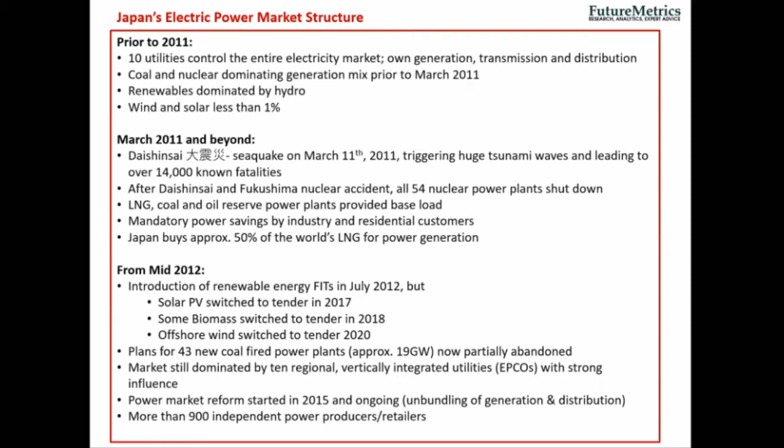Overall, on the renewable side, as of the end of last year, Japan had a total of 63.4 gigawatts of renewables capacity operating. As you can see, the vast majority is solar PV, but then there's about 4 gigawatts of biomass power. What's going to happen in the next several years is offshore wind power as well - there's a project pipeline of over 15 gigawatts in planning.

Another major factor that will drive especially biomass power development in the future is the capacity market that basically started this year. The capacity market provides an opportunity for a power plant to be ready to provide a specific amount of power when needed, either because there's demand or because it's required for grid stability. That capacity market hasn't existed before, but it's starting now, and it's another opportunity for power plants in general, but also biomass power plants, to sell power into the market.

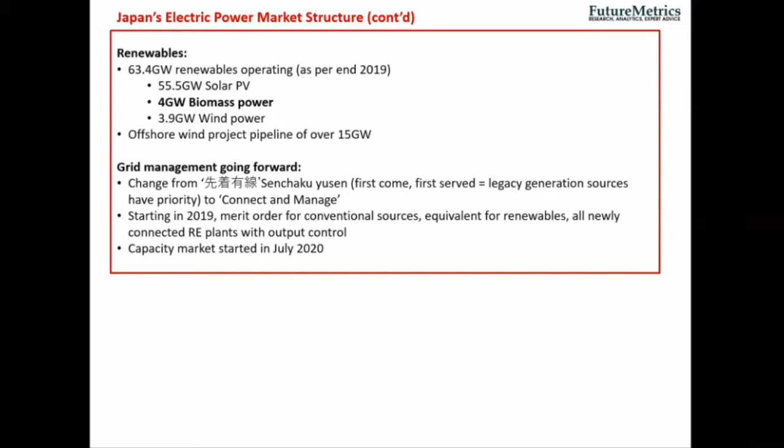So what does power generation in Japan actually look like over the past 10 years? Obviously, up until Daishinsai, up until March 2011, nuclear played a major role. The nuclear power plants were stopped, and you saw a spike in the use of fossil fuels - basically coal, liquefied natural gas, and oil. Those were reserve power plants that most industrialized nations have - plants that normally don't run, or run at very limited base, but kick in during a major emergency.

So Japan actually got through this major shift by conserving energy, but also by switching on and running their reserve power plants.

By the end of 2019, renewables, if you include hydropower, which Japan has had quite a bit of even before Daishinsai, now supply roughly 20% of Japan's power demand. The existing Japanese government plan has a target of 22 to 24% renewables by 2030. So that's close to being achieved already, and I think we're all looking forward to the new government strategic energy plan, supposedly coming out sometime this year, to see if the target is being revised.

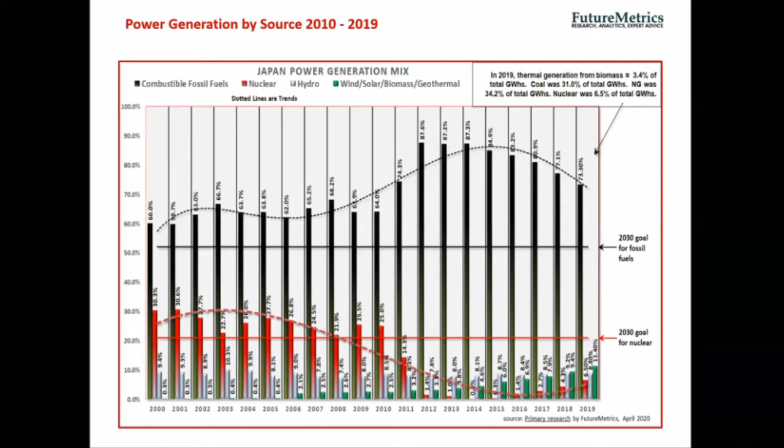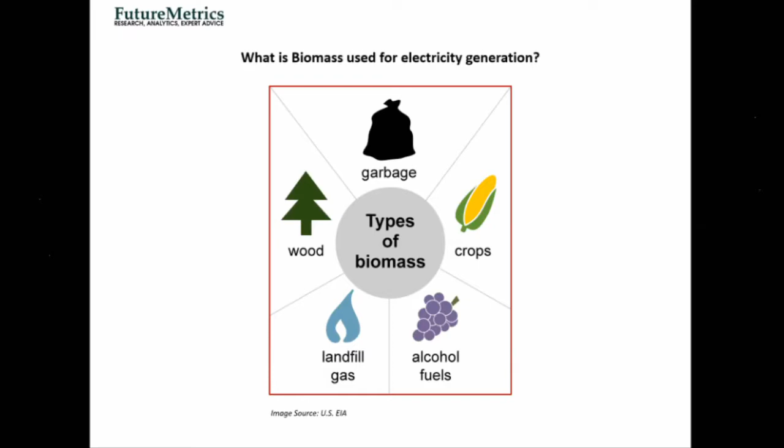So when we talk about biomass for electricity generation, what does that actually mean? Biomass can come from different things - it can be garbage or trash, as we say here in America, it can be different crops, different alcohol fuels, landfill gas or other biogas, and obviously wood. Our focus today is mostly on woody biomass and a little bit on crops, because we're going to talk a bit about PKS.

So when we talk about wood, there's always the question - can the use of wood be sustainable? There's forest management, there's good wood and there's bad wood. Like with any energy source, if it's done right, if it's done well, it's sustainable, or less harmful to the environment. If it's done without any system or control, it causes damage.

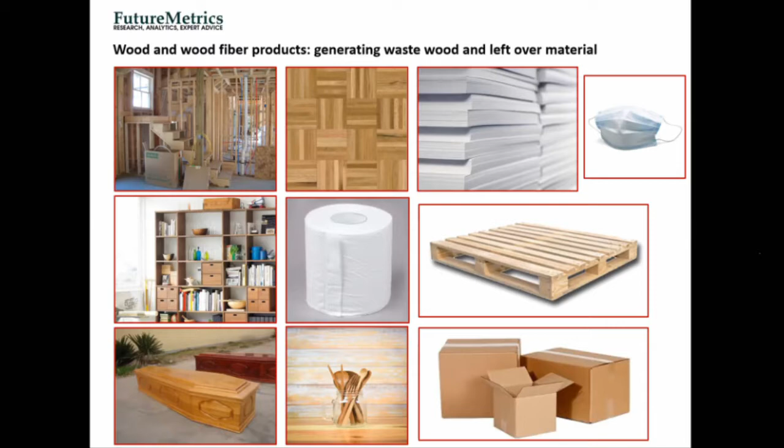Wood pellets are specifically manufactured for energy use, and they're normally sold under long-term supply contracts. That's very important, because it's the confirmed supply contracts that make a biomass power plant a bankable project. If you apply for financing with an investor or a bank and you cannot show where your fuel supply is coming from, you will have a tough time getting financing for your projects.

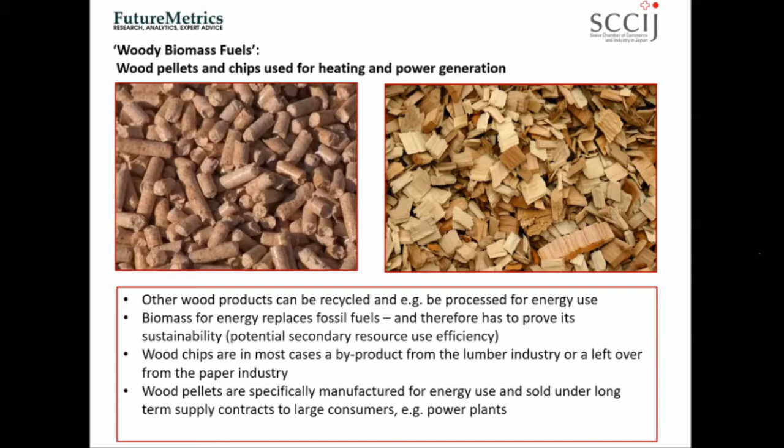Wood pellets in particular use part of the tree that isn't being used for anything else - it can be sawmill residues, from sawmills that saw your lumber for home construction - that's basically trash, so pellet mills buy that. Or wood thinnings, when you have trees that you have to cut to make room for the remaining trees to grow. It can also be low quality wood.

For example, the Canadians have had their fair share of wood pests, and they've used trees damaged by different insects that you couldn't use for high quality paper or other high quality wood products - you can use them to make pellets. It's a topic being discussed in Germany right now because they have over 32 million cubic meters of bark beetle damaged wood.

It can also be limbs. What good pellet producers avoid using is full saw timber - that's high quality wood that can be used for a lot of other more high value products. Later, either the waste wood from the manufacturing process can be turned into pellets, or when that product, whether it was housing or some other lumber product, is at the end of its use, it can be turned into pellets.

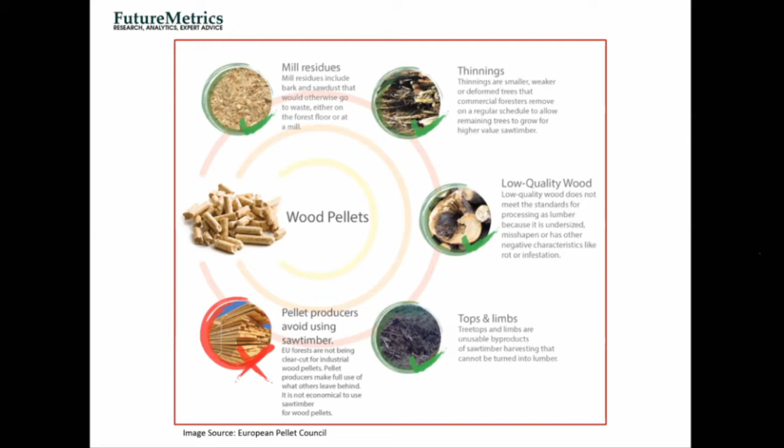The other biomass having a fairly sizable role in Japan is palm kernel shell, or PKS. That's basically a byproduct from palm oil production, coming mainly from Indonesia or Malaysia. It's sold at spot market price or short-term contracts, so it's not a bankable fuel. It's a cheap fuel, but unlike pellets, it's not made specifically for power generation - it's something you can buy as an add-on fuel, but you wouldn't really plan a total power plant to be fueled with palm kernel shell.

PKS is also quite controversial because, again like with woody biomass, you have palm oil plantations with sustainable management, and then you have sort of Wild West PKS farms. So making sure that the PKS brought into Japan actually comes from sustainably managed palm oil farms is a challenge and quite a controversial subject - it's actually a topic the Japanese government is trying to introduce more regulations on.

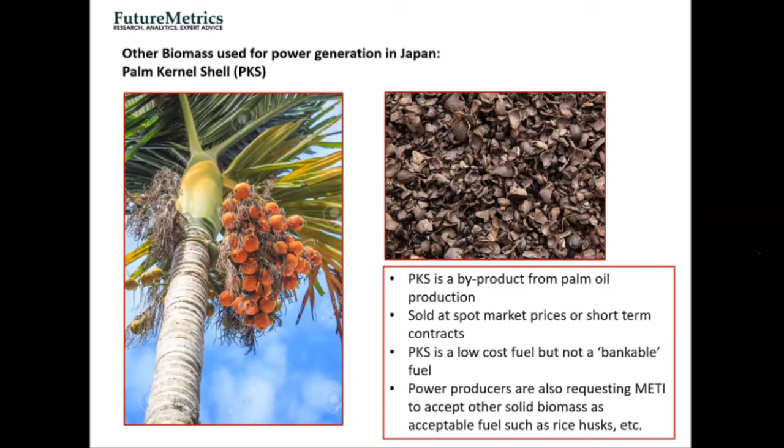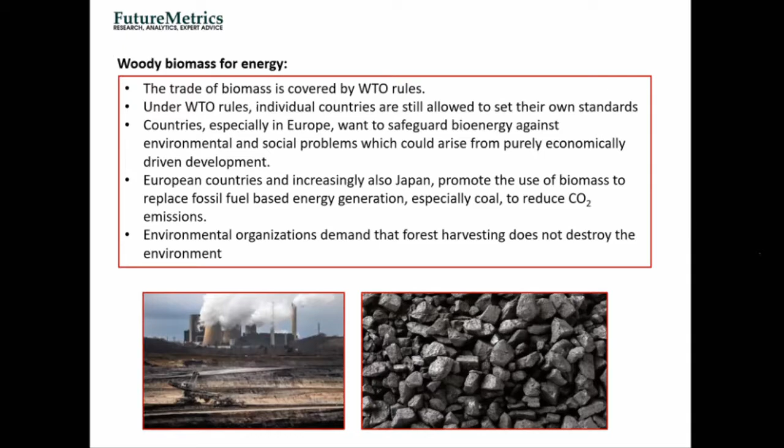So in Japan, how does it work in terms of how the power generated with biomass power plants actually gets sold?

The way it works in Japan is the feed-in tariffs were launched in July 2012. Every year there's a METI pricing committee that sets the new tariff for any new projects that apply for new certification. So if you got your feed-in tariff for your project in 2012, and a few years later you commission your plant, but you applied for it in 2012, you get the 2012 tariff.

If you applied for feed-in tariff certification in 2017, you get the 2017 tariff. So as you can see, it started off with basically only 3 different categories. Biomass, which was only forest thinnings, meaning mostly domestic Japanese wood for biomass power plants above 2 megawatt, got 32 yen, a good price. For roundwood, 24 yen. You can already see the government said from the beginning, we don't want roundwood or biomass from roundwood being fired. We want to use that for higher value products. And then you got a different price for construction debris.

So that has evolved over time. The government introduced a special feed-in tariff for small biomass power plants up to 2 megawatt, and those are mostly plants in rural areas in Japan that use local wood and biomass supplies. It's as much an energy promotion aspect as it is an economic development to revitalize rural communities and use the woody biomass that's available in those areas.

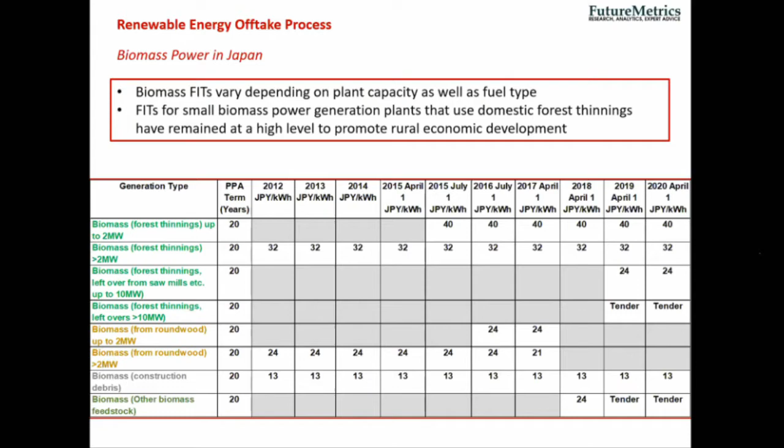And then in 2019, for larger projects, the government basically stopped the confirmed flat rate 20-year feed-in tariff and switched to a tender system, just like they had done in 2018 already for solar PV.

So when we look at the tenders, it's still fairly new. The first tender was in 2018 for 180 megawatt. What the government does, they have a ceiling price, or the maximum price that a bidder can put in, but they don't disclose that, so you have to be second guessing what it might be. There was basically only one winning bidder that stayed below the 20.6 yen per kilowatt hour, which was Soma Kyodo Power. But then they canceled their bid because they decided to wait until this year to bid into the capacity market, because they will get more per kilowatt hour.

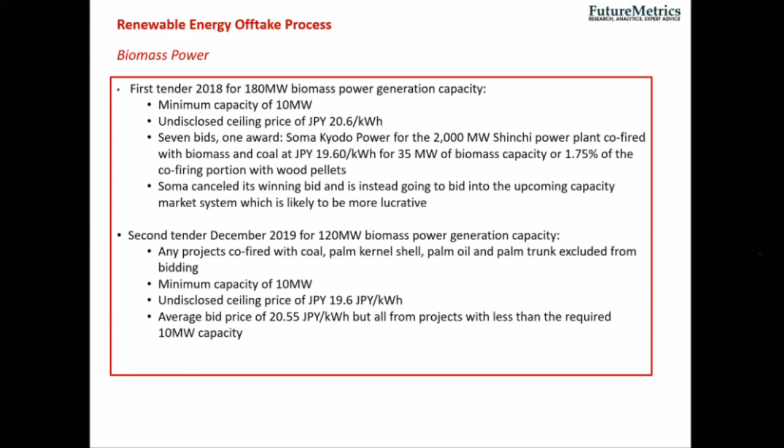The second tender was in 2019 for 120 megawatts of biomass power. The big difference there was that the government no longer allowed projects that used PKS, palm oil or palm trunk, as fuel. So this was a fully 100% woody biomass tender. But nobody won because all the bids were above the undisclosed ceiling price of 19.6 yen per kilowatt hour. The reason there were so few bids is because a lot of the projects already applied for their FIT and have their FIT price already, so at this point they don't need to bid into the tender to be able to sell that power. But obviously, that's going to change over the next several years.

There were also a number of coal plants that co-fire biomass. So if you have a coal plant in Japan and applied for the feed-in tariff for biomass, say in 2015 or 2016, for that portion of biomass-generated power, you get that feed-in tariff. What the government did in 2019 was make sure that ratio stayed the same, so that the coal plants that co-fired did not basically replace that again with coal.

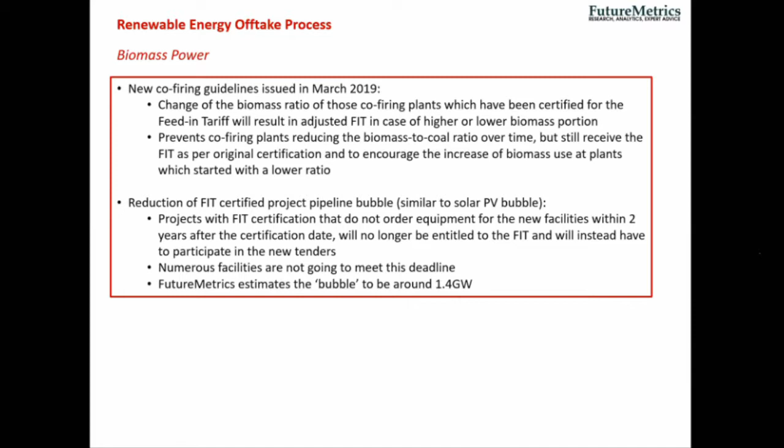So you do have a bubble, just not as extreme as you have on solar PV, but quite sizable. If you look at this number, you had more than 6 gigawatts of biomass power from project owners that applied for receiving the feed-in tariff, but a lot of these projects were never built. What was actually built and commissioned was 585 megawatt until year end of 2018. By the way, this is 100% biomass fueled projects, so this does not include co-firing.

So what the Japanese government has done is, last year, they said out of these over 6 gigawatt of projects, plants or project management teams that have not ordered their equipment by March 2020, they have basically lost their FIT certification. They then have to go through a tender or go to a tender in the capacity market. Similar to what was done on solar, the government is trying to let the air out of the bubble so that whatever is in the project pipeline is actually real projects that will actually be built.

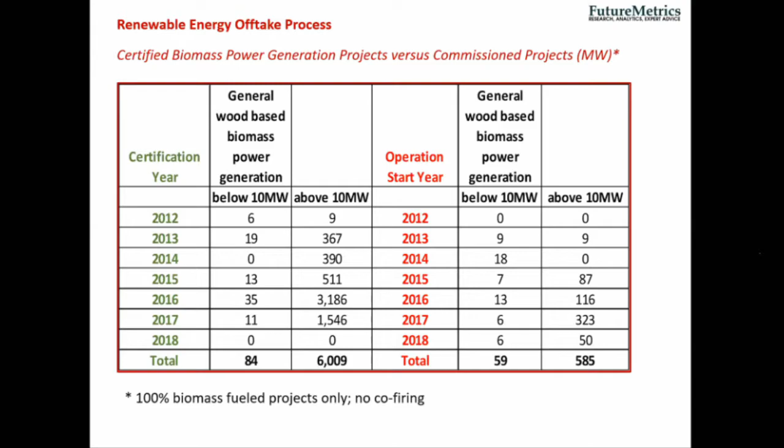So where does biomass fuel in Japan actually come from? Starting with domestic biomass, what is being used in the various biomass power plants can be wood thinnings.

Yeah, and again, this is all domestic wood, and you see that that portion has been increasing because it's a very attractive feed-in tariff, especially for power plants below 2 megawatt.

Then you have lumber mill residue. Again, a lot of the smaller lumber mills are in rural areas, so they will have sawdust and waste wood that can be used.

Quite a bit of these plants use construction waste. Few use imported wood chips, though those are often waste wood or leftovers from the paper industry.

So the challenge with domestic biomass supply in Japan is that Japan has a lot of wooded area, but the land ownership is very fragmented. For example, 27% of private landowners own less than 5 hectares, and another 28% own between 5 and 10 hectares. Those are very small plots, and that makes forest management and harvesting, including building infrastructure like logging roads and transportation infrastructure, very tricky and expensive.

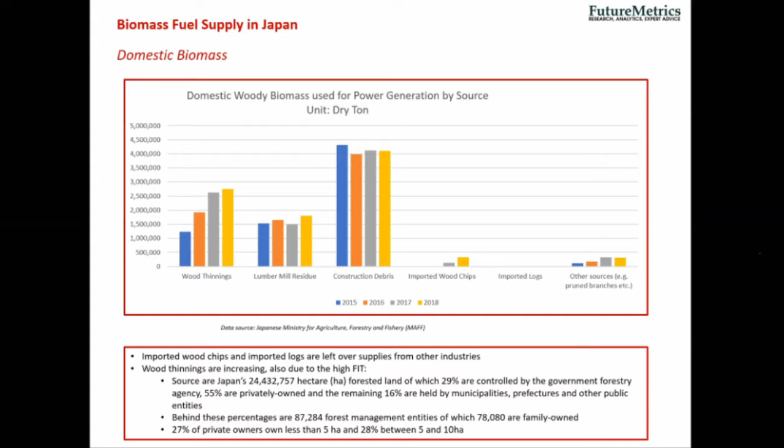Another major biomass fuel is imported wood chips. It's quite interesting when you look up the total amount of imported wood chips into Japan - it was over 12 million metric tons in 2019. However, a vast majority of this goes to the paper industry, about 7.5 million metric tons in 2019.

And then we worked out that about 3.1 million metric tons of wood chips actually go to particle board manufacturers - your plywood boards and different boards used in construction. So the wood chips theoretically available for fuel use are about 1.4 million metric tons, and we think there's probably close to that amount actually being used for biomass power generation.

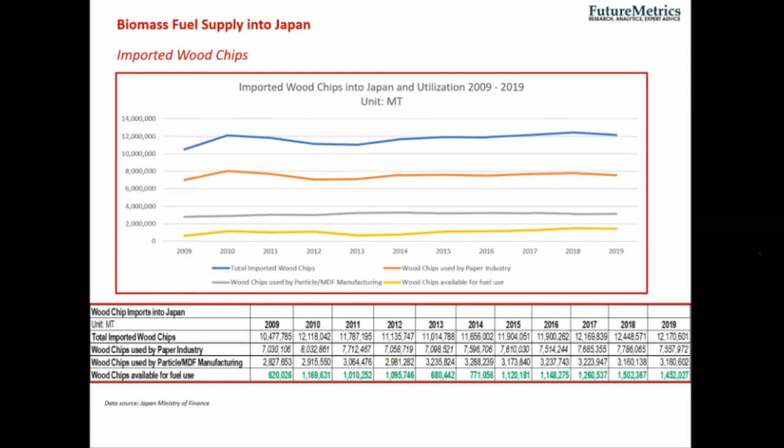PKS, the palm kernel shells, basically come from Malaysia and Indonesia. Indonesia is by far the largest supplier. The cost has been fairly stable, though Indonesia keeps adding special tax - it used to be 5, then 10, and recently $15 per metric ton of special tax on any PKS being exported from Indonesia.

But compared to wood chips or wood pellets, it's a low cost fuel source, and also because it's in Asia, the transportation costs are a lot lower.

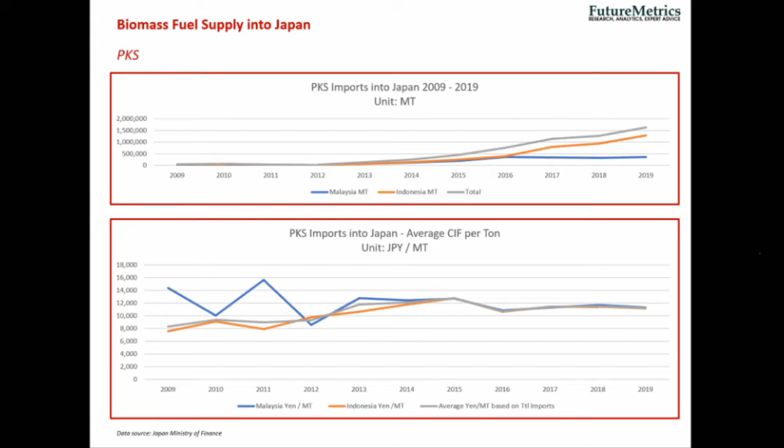Wood pellets used to come predominantly from Canada. Canada used to be by far the largest supplier, but was overtaken by Vietnam in 2019, and so far Vietnam looks on track to probably again be the #1 supplier. The reason for this is Vietnam has a large furniture sector, so there is wood and waste wood there.

Obviously the logistics and transportation is a lot closer than, for example, bringing in pellets from the west coast of Canada. There are obviously concerns about whether all the wood used for wood pellets out of Vietnam is really sustainable, and that is another major discussion topic in Japan right now.

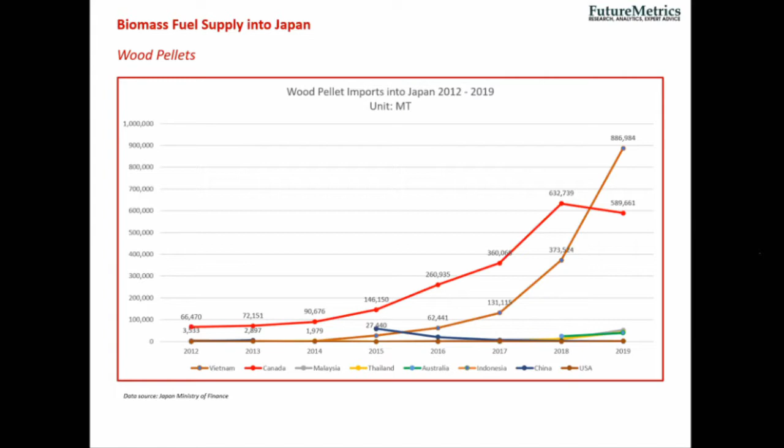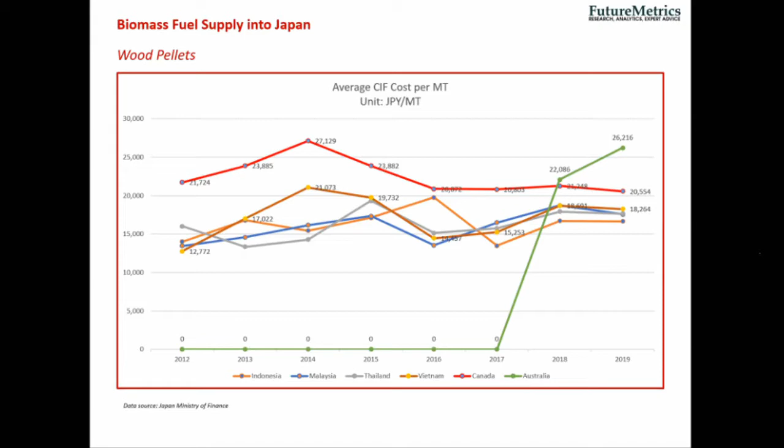So who is using what in terms of biomass fuels in Japan? Not all power plants really disclose in detail what they're using, based on what we know.

So out of the 125 coal plants currently operating in Japan, about 68 are co-firing with some sort of biomass. And among the 20 being planned to be built, about 7 plan to do co-firing. So that's a sizable number.

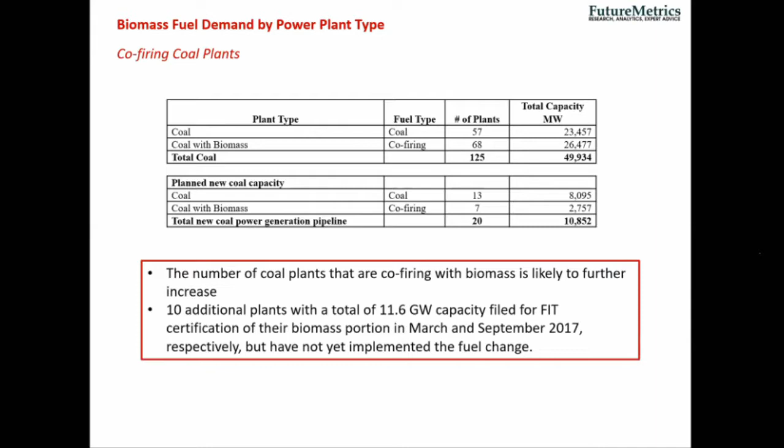What are they using? Not all of them disclose, but there are quite a few that use some type of woody biomass, domestic or imported. Quite a few use PKS, and a large number uses wood pellets. That's because for an ultra supercritical coal plant, it's very easy without major technical adjustments to put in wood pellets instead of coal, or another biomass mix combination. The coal plants in Japan that applied for the feed-in tariff for the portion they're co-firing get that amount of money, same as a 100% biomass fuel power plant gets. So that was one of the major reasons coal plants decided to get into co-firing.

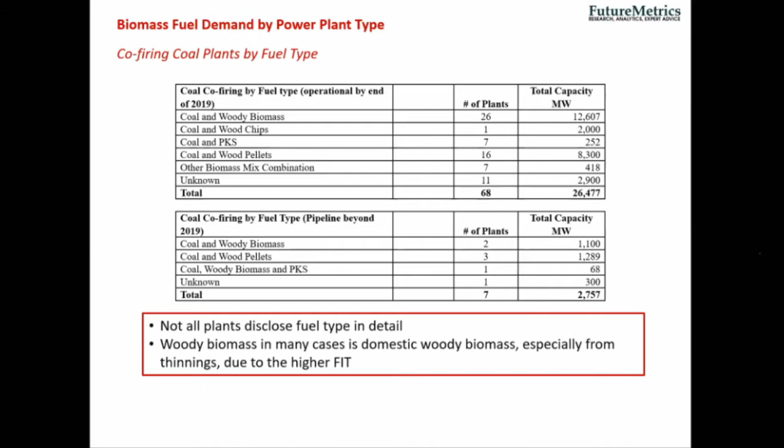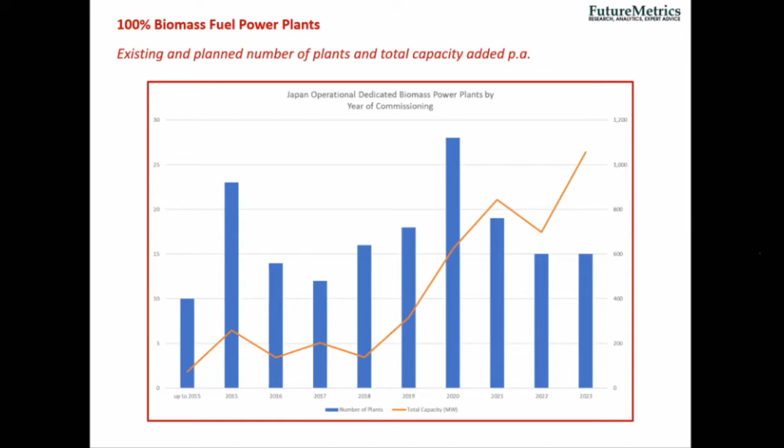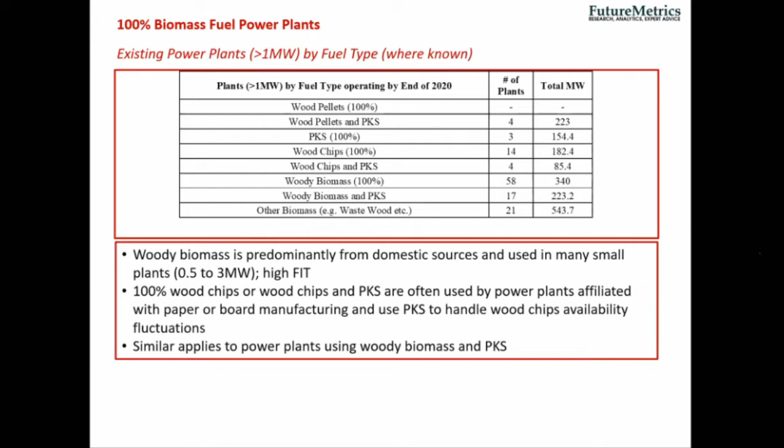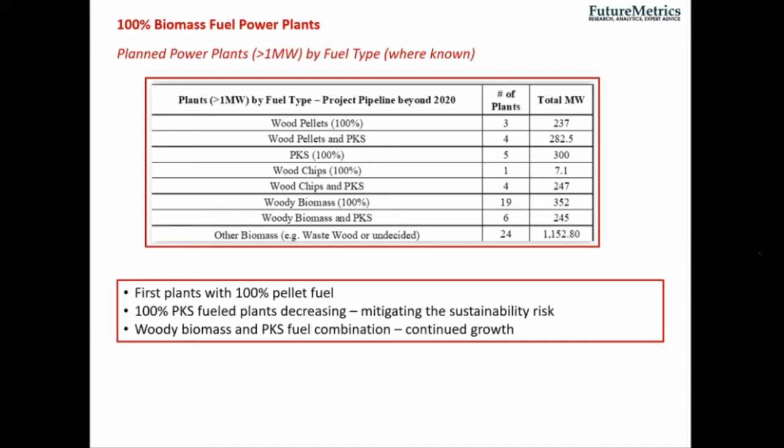Going forward, you see wood pellets—there's a few more biomass power plants coming online with wood pellet use, or wood pellets and PKS. Import locations in Japan for wood pellets are predominantly Tohoku, some in Kansai, some in Kyushu, because this is where a lot of the plants are.

A challenge in Japan is that its ports don't really have infrastructure right now for wood pellet import. Wood pellets need to be stored in a covered, closed environment—you cannot just pile them up in heaps because they will absorb humidity and then can no longer be easily processed and fired. There's right now only one port in Japan, in Yokkaichi, that recently opened a woody biomass including pellet storage facility. So logistics in Japan for wood pellet import still have to be quite sophisticated and well planned, so that when the vessel arrives with the pellets, they get transported very quickly to the power plant where they can be stored properly.

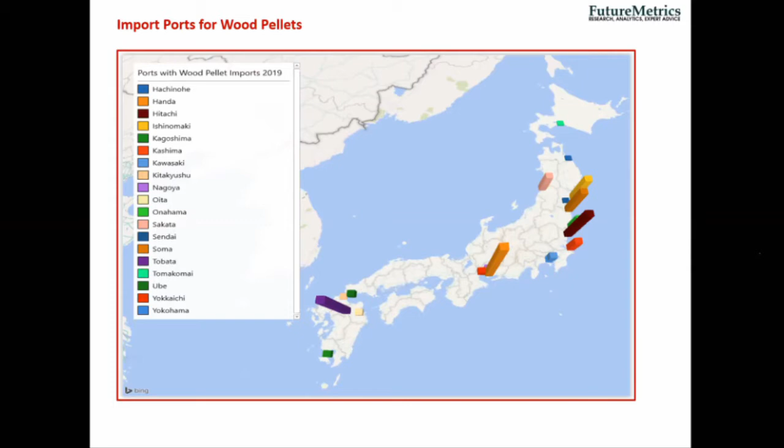At FutureMetrics, we constantly get asked what the demand is—what is the amount of wood pellets in Japan going to be like? We get these questions from power plant operators, from pellet suppliers, but also from the investor community. If we go by the current project pipeline, and assume that PKS will be less popular because of new sustainability requirements set by the Japanese government, we're assuming that by 2025 you could look at more than 9 million metric tons per year of wood pellets imported into Japan. That's one of our scenarios.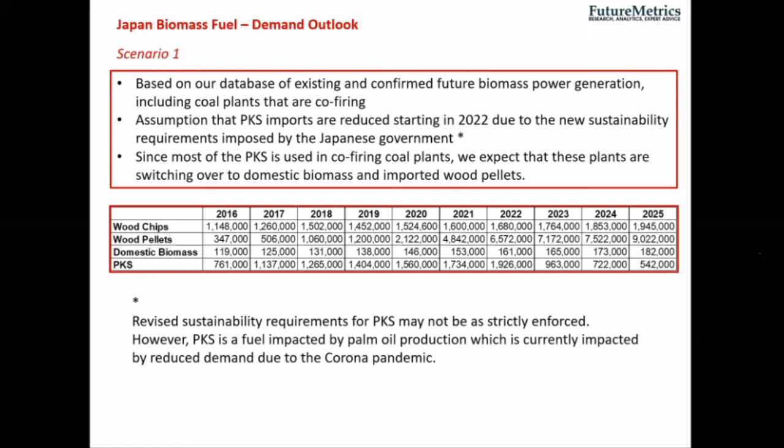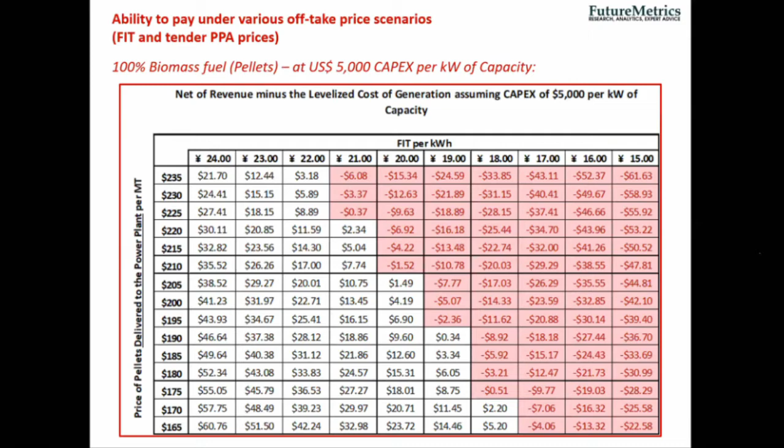Obviously, that gets even more challenging if we use a scenario of $5,000 US dollars capex per kilowatt. Basically, you need at least something like 21 yen per kilowatt hour to make money. Or for some reason, you have to get the cost down, which again, if you want to buy good biomass from sustainably managed forest, that all comes at a cost. And then again, with $8,000 capex, unless you go into the capacity market where you can get more than 24 yen per kilowatt hour, it's not a worthwhile business anymore to be in.

So at FutureMetrics, we can run all types of scenarios. We also have run scenarios, for example, if a certain amount of Japanese coal plants were increasing their biomass share or switching to 100% biomass, what would the demand look like, and also what are we looking at in terms of cost?

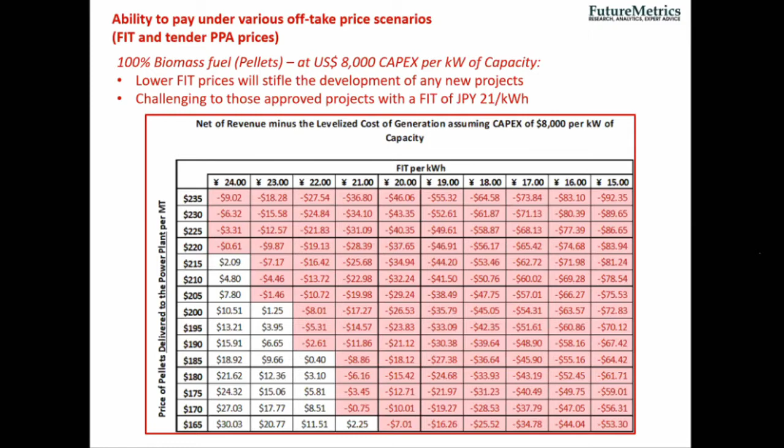So this is going to be the interesting question. If the Japanese government can keep the biomass power price at a certain level per kilowatt hour, and the supply chain, obviously on the supply side but also on the Japanese logistics side, can get the cost down, yes, we will see continued use of biomass power in Japan. If these things don't work out well, then that could be challenging times for the sector.

So concluding, we at FutureMetrics believe that there is a long-term future for biomass power, especially in the capacity market. We also think that the renewable energy targets overall are on the conservative side, so they are achievable. Wind and solar are obviously intermittent renewable energy sources. Biomass power is non-intermittent. It can be used as a base load provider.

And with nuclear power plants disappearing, and Japan also eager to reduce its CO2 emissions to meet the Kyoto and Paris Treaty targets, biomass power can play a major role. But it also will depend, obviously, on suppliers to manage capacity and cost. And Japan has to invest in infrastructure and logistics, especially for pellet import.

That is, I think, one of the key questions. If you look at what Japan has done on the liquefied natural gas side, they have built a lot of LNG terminals. They make that happen. If the government views biomass power as a long-term base load power provider, then I think we will also see increasing investment in the logistics side as well. And then this could mean Japan could become one of the largest biomass power markets worldwide.

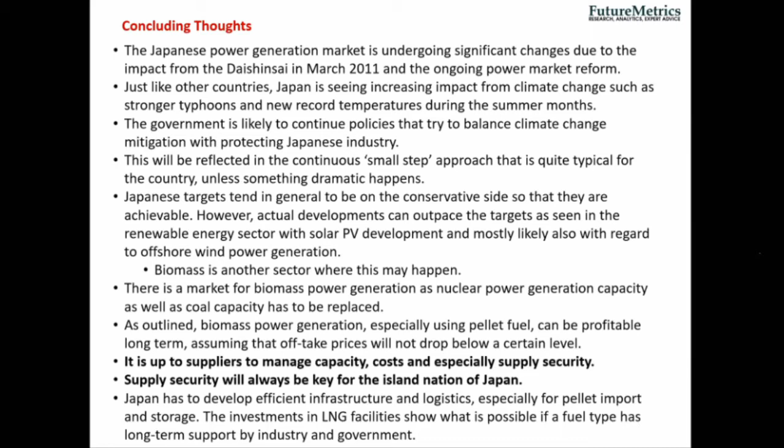And I thank you for your interest, and I'm happy to answer questions, or at least try to.

Ms. Bossler, thank you very much for this deep insight into the biomass and wood pellet market in Japan. Thank you very much also for agreeing to answer a few questions from our audience. Actually, it seems that a lot of people were inspired to ask questions. So let's just get started.

First, it seems that our audience is very diverse, from a lot of experts in the field, but then there are a few lay people, like also myself, who didn't know much about biomass and wood pellets before your presentation. So what I was first wondering, in Japan, a lot of garbage gets put on a ship and exported to whichever country where it magically disappears. But you mentioned in the beginning of your presentation that garbage could be used as biomass fuel. Why is it that this is not happening in Japan?